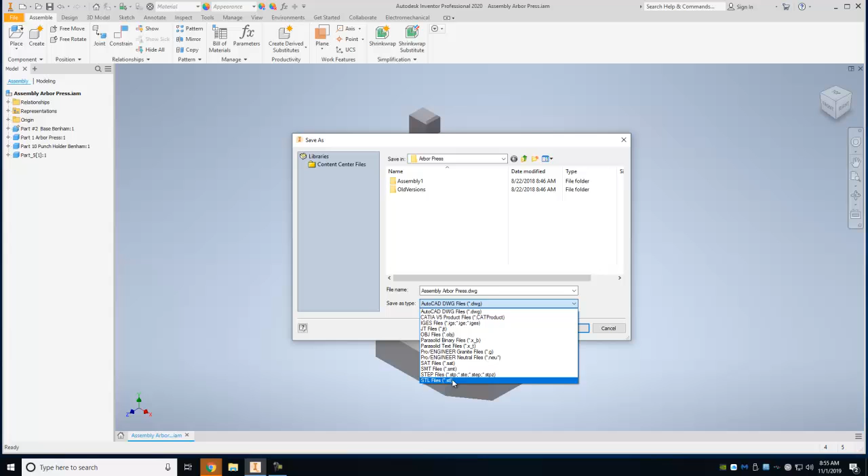Now every 3D printer is a little different, okay, but we're going to go ahead and select STL. That's pretty standard, okay, and then we're going to go to Options.

And this is an important thing - for our 3D printer, we want to export this to millimeters, and we want the resolution to be high, all right? You don't have to mess with the sliders, but we do not want to default it to the BREP. We'll keep the resolution high, all right?

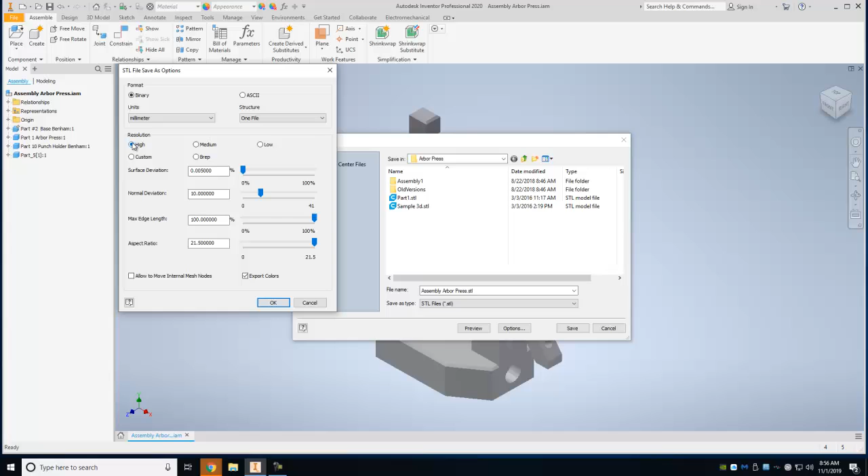And then once you have that, you'll hit OK, and then you'll save it - Arbor Press, whatever your file name is, that's fine. Just notice it's an STL file now, and note where you're going to save it at. So we'll save it.

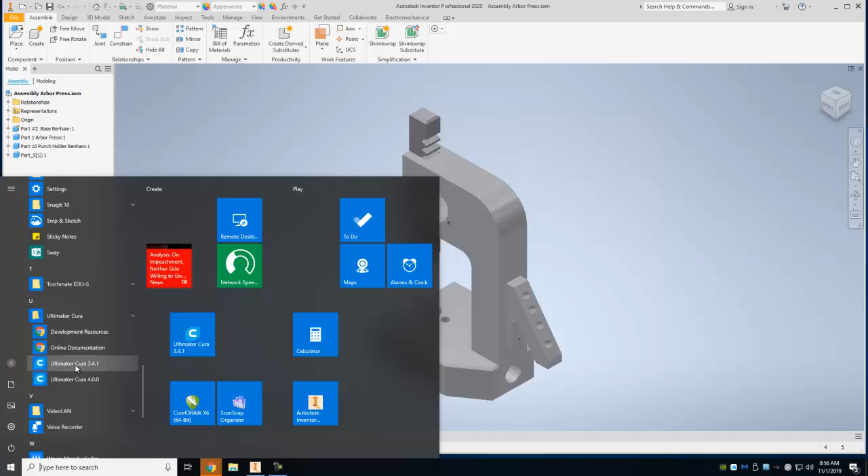Now that this file is all saved, we're going to go over to the Windows icon, and on your computer it should be under Ultimaker Cura. I think your version is 3.4, if I remember correctly. So I'm going to go ahead and open that up, and that'll just take a second to load.

If it does ask you to update this, just don't - let's keep it all at this particular version. See, right here, it's already up to this version, we'll just X out of that, that way all the screens look the same.

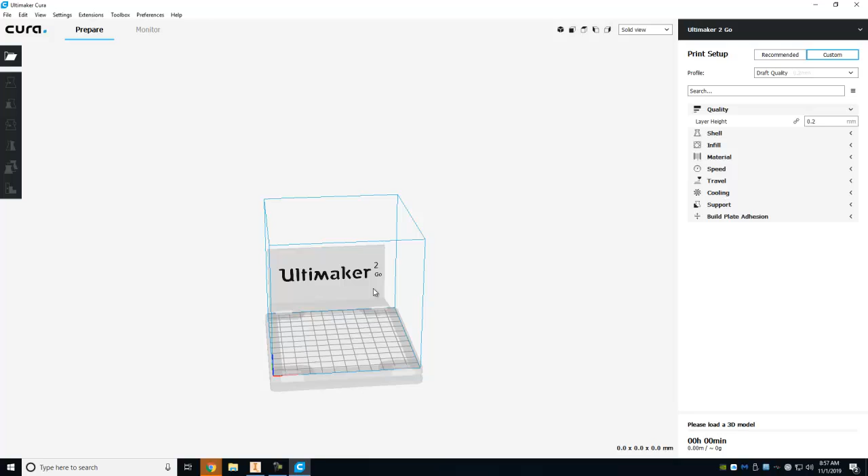Now, there's a distinct possibility that the Ultimaker 2 Go is not set up for you yet. If it's not set up, we might have to do that, but mine's in here, so we'll just take a look right now.

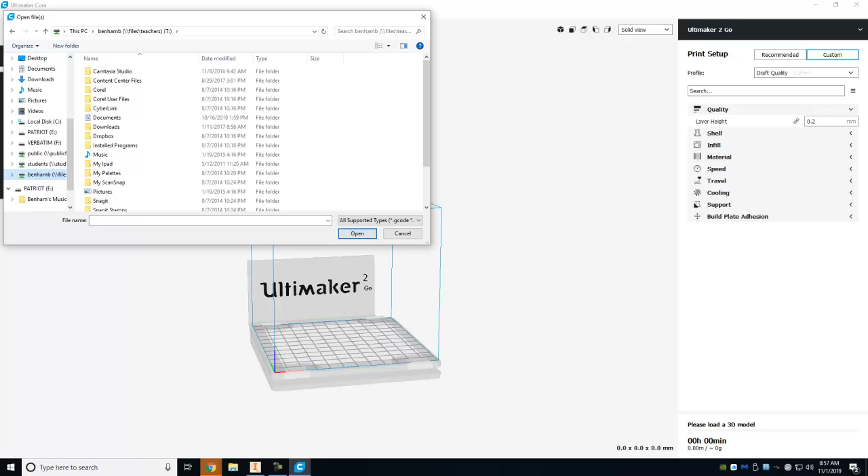So we'll go to Open File, and you're going to find where you created that file - mine should be in my Inventor folder somewhere. So yeah, it's in Documents and Inventor and Arbor Press. That's the one I just saved, .stl.

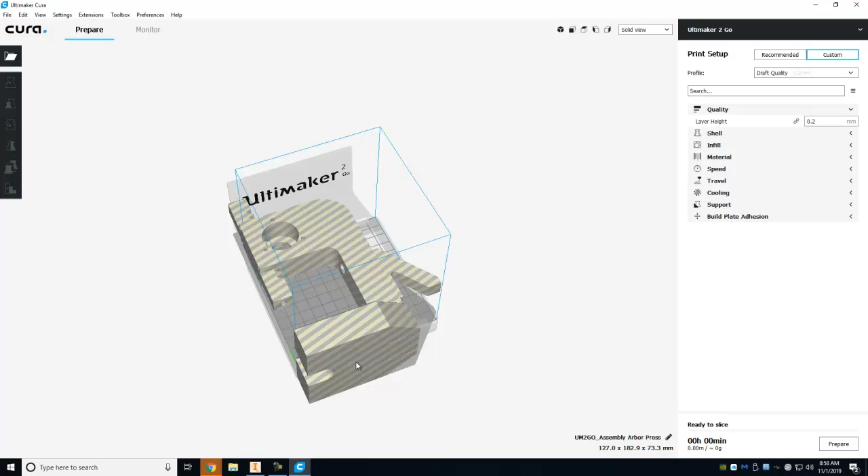Hit open. Now if you look, this thing comes in and it's like, hey, it doesn't fit - that's why it's got that little caution icon. And that's okay, because we can make it smaller.

So we can come down here and go to Move, Scale, Rotate. We want Scale, and we want it to be uniform scaled. It doesn't really matter which one we select here, we can select any of these. I'm going to go ahead and select this green one and just start to scale this thing down.

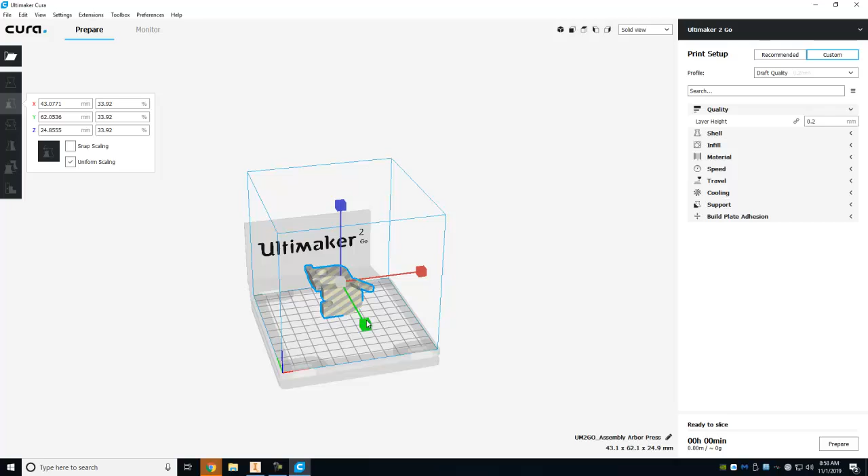What I'd like to do is try to take this thing down - you can also come right over here, we're going to take it to 25%. So type in 25, hit enter, and that's going to make that a 25% scale. That's how big we want to try to 3D print that thing.

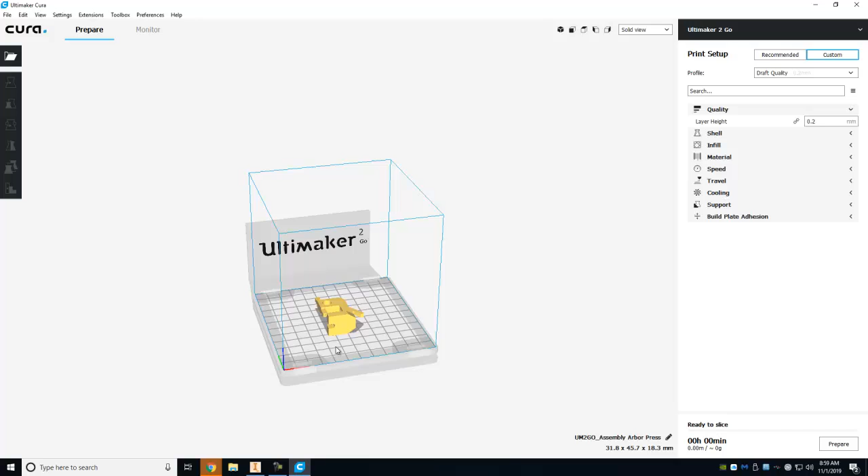So once you're done with the 25% scale, you can click out. And now you've got to decide, how do you want to print this model? Do you want to print it laying down like that, or do you want to print it in a different location? That has to do with just honestly personal preference.

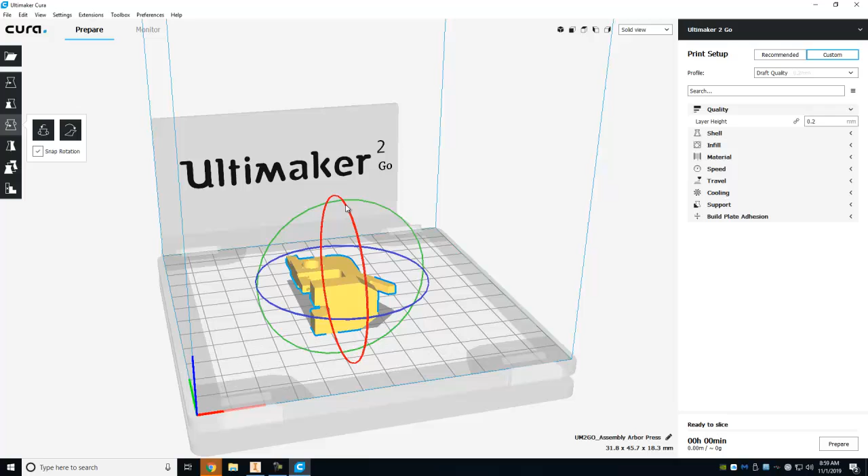So we're going to go ahead and rotate this thing and make it sit like it would if it was sitting on a table. I'm going to go to rotate, and it looks like on my particular model I'm going to have to rotate this red box. So I'll left click and drag that red circle until I get to 90 degrees, and then drop it. Yours might be something a little different.

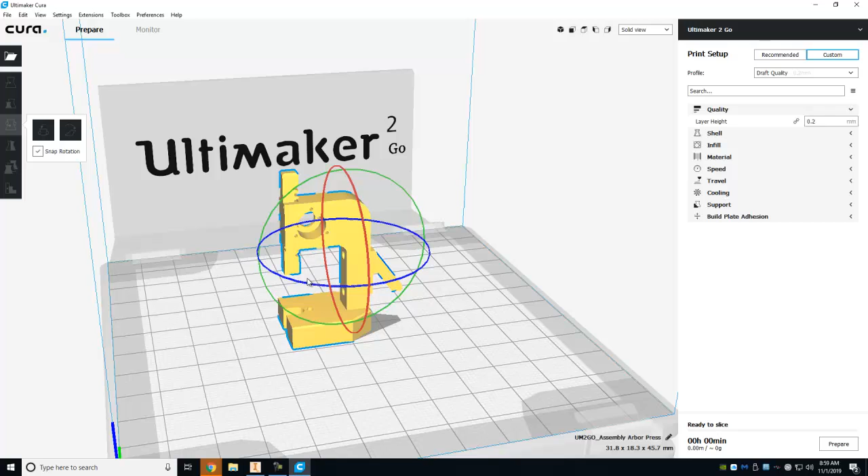That looks good. If I wanted to rotate it the other way so I can see it better, you don't have to, but I can rotate this 90 degrees this way, then click outside of here. And that's my little Arbor Press guy I want to make. So there it is, sitting in the middle of the screen, and that's fine.

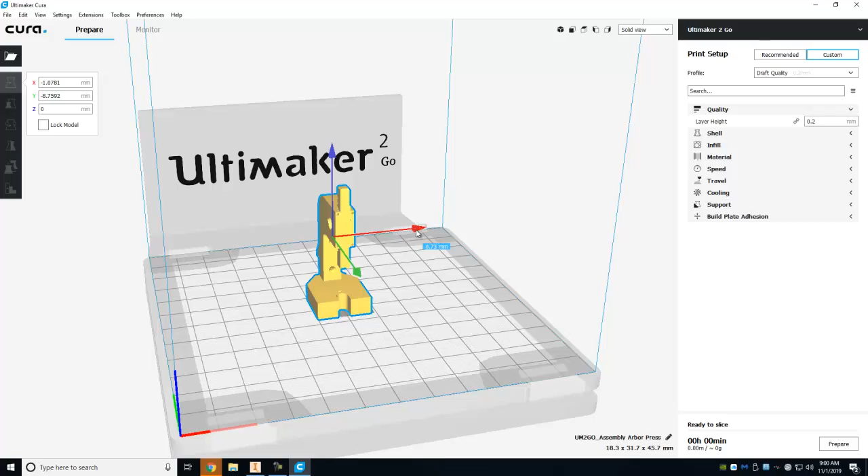If we need to move it, maybe we don't always want to print in the same location, we can just click and drag these around a little. Maybe we want to print over on this side of the bed or over here. So that's how you do it. Now you've got this thing ready to go, and we just need to set up some information here.

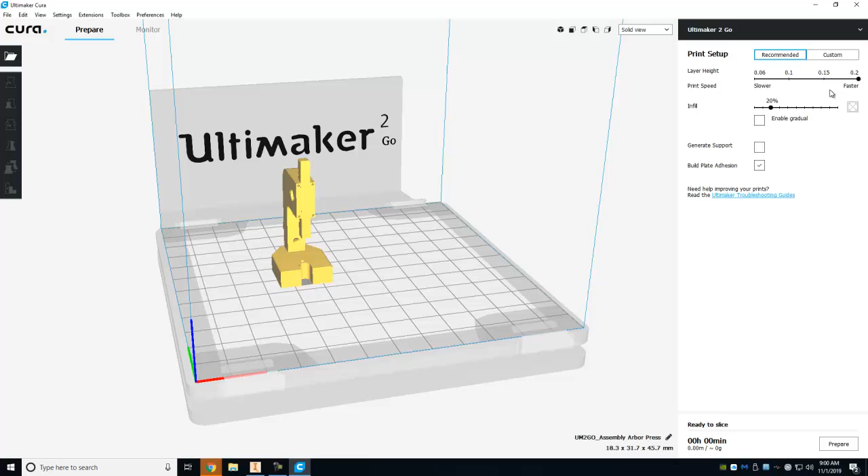On the side here, it should be set to recommended—sometimes it defaults to custom, but we want recommended. We want the layer height to be 0.2 because it'll print as fast as possible; there will be some quality issues, but we'll keep that as is. Make sure it's 0.2, make sure it's 20%, make sure you have generate support selected, but take off build plate adhesion.

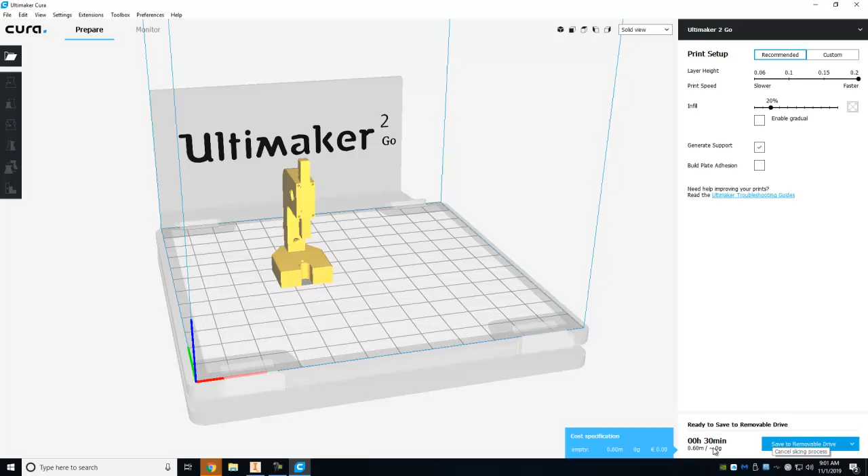Once we have that selected, we're ready to go, and you click Prepare. It's going to slice this model into little tiny layers. And if we want to, it's done—it says it's going to take 30 minutes to print. Sweet, that's fast. We like it.

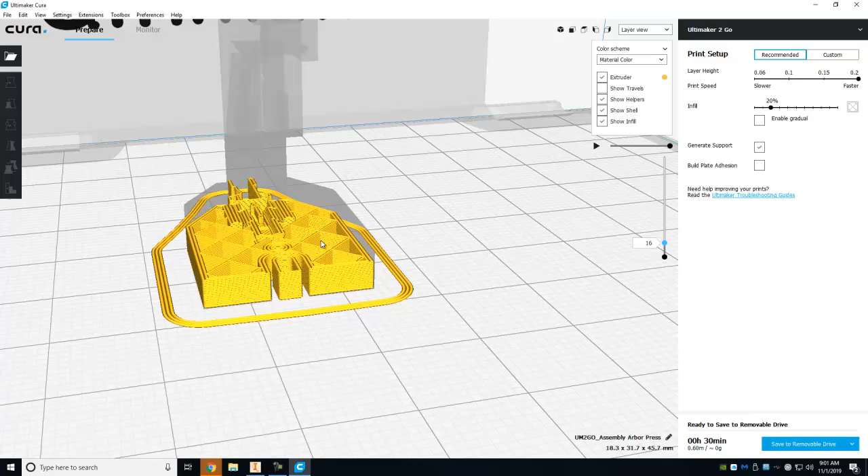Go to Layer View right here—this is kind of fun. It says it's going to take 228 layers of plastic. If you click and drag that thing down, this is how the layers will print. I'm going to zoom in a little so you can see that. So this is the infill we have right here—it's not very much. As it builds up, it shows how it'll build this whole Arbor press up. Pretty cool deal.

I think I want to change that a little bit—I want to change this infill. So I'm going to change this to 50% to make it closer, and then I'm going to have you hit Prepare again.

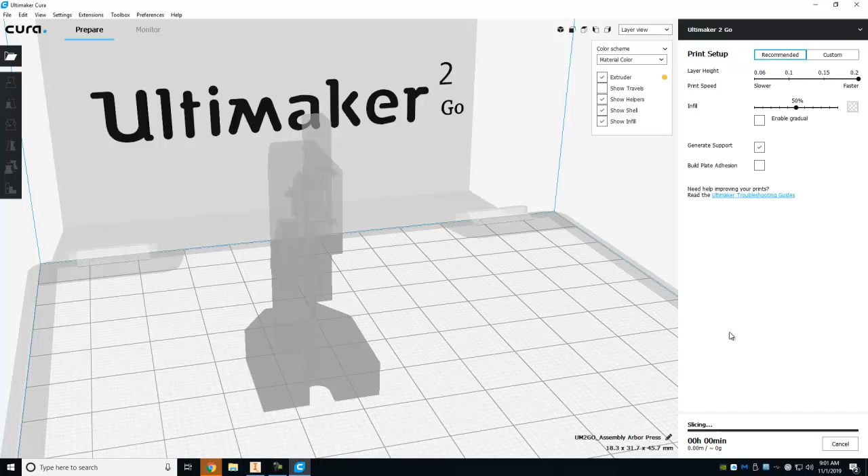It's going to take a little bit longer to print and a little bit more material, but I do think, as we get down here, it's a much tighter grid. It'll be a much stronger print in this case. So I'm good with that.

If you're good with that, we're ready to move on to saving to removable drive. What you'll need to do is there's a special jump drive, so ask me for it. It has an SD card, like a camera card, in it. You're going to use the adapter, plug that into the USB drive, and click Save to Removable Drive. Then you'll bring it over to me, and I will show you how to plug that into our little printer and get this thing going.

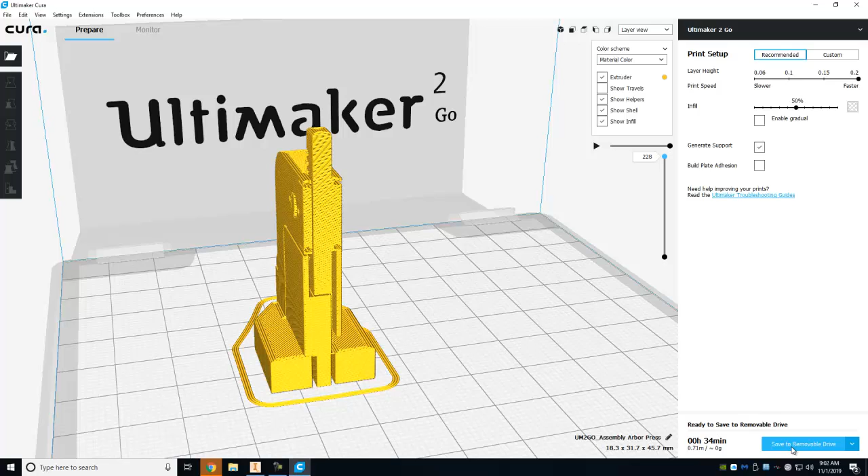If you have any questions, let me know. Other than that, that is the process. Let's rock and roll.